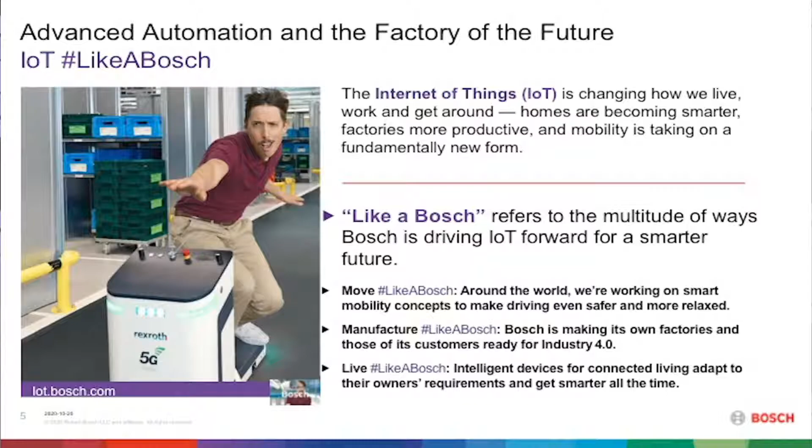Since we are not only producing solutions for third parties, but also provide solutions for ourselves, we launched a campaign worldwide, which is called Like a Bosch. So that addresses not only how we work and how we live in our houses, but also how smart mobility concepts could look like, or how the future of manufacturing could look like.

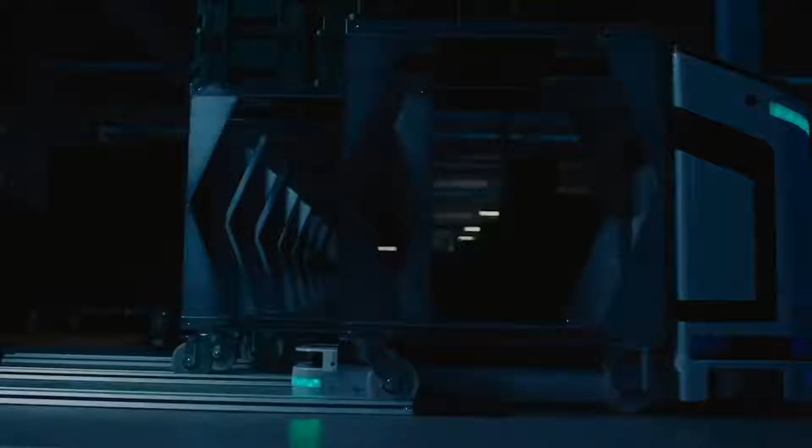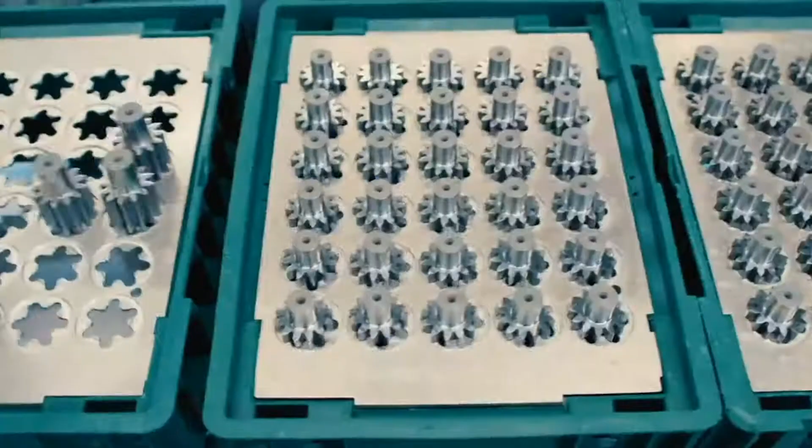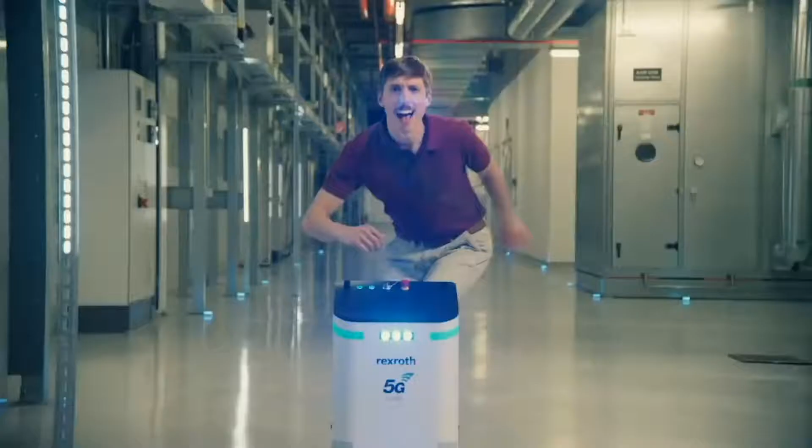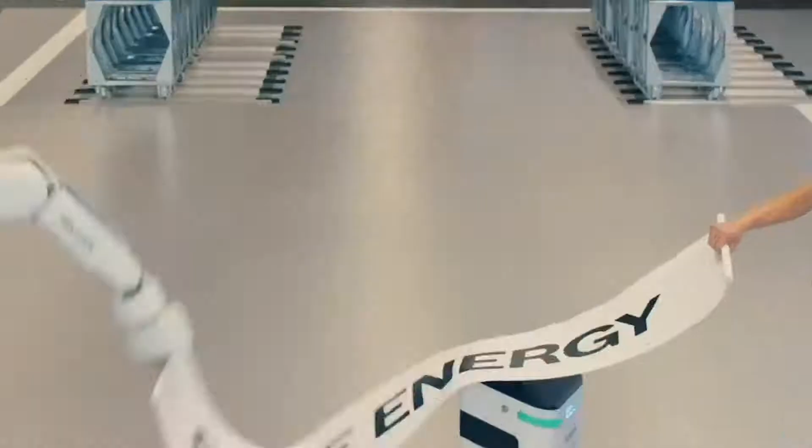Let's produce like a Bosch. Easy use, connect machines like a Bosch. Perfect team like a Bosch. Flexible line like a Bosch. Make it mine like a Bosch. No downtime like a Bosch. That's worth a rhyme. Did you say no downtime? That's not true, we have scheduled downtime. Like a boss. Control the tech like a Bosch. Phone check like a Bosch. Go 5G like a Bosch. IoT. So efficient, that's our mission. Never stressed, like a Bosch. AR test, like a Bosch. Data cloud, like a Bosch. Makes me proud. Together we save energy. Like a Bosch. IoT, IoT, IoT, IoT.

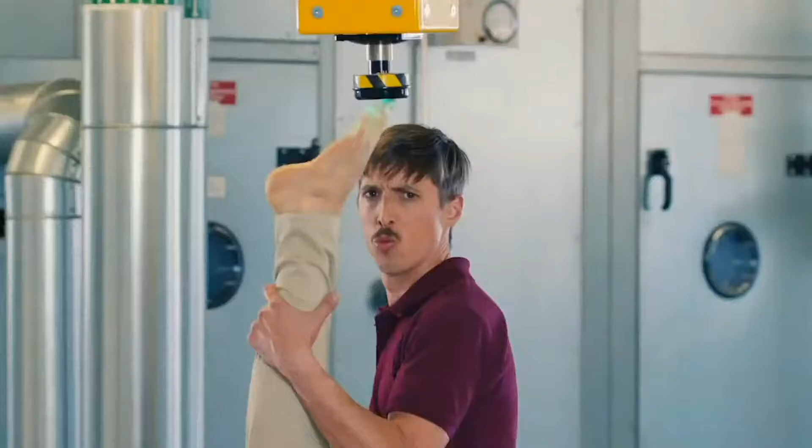Wow, there's a lot to do.

As I already explained, we are also developing solutions for advanced automation and the factory of the future. We started that journey many years ago, and we were testing a lot of those solutions in our plants. Obviously, this was a very technology-driven approach. We got the latest and greatest technology, thought about what we could do with it, and started implementing.

This worked out for a while, but then 3 years ago we did a reset. I'll explain how that worked in the next slide. We got carried away with the technology and forgot a little bit about our requirements and why we were doing certain AI solutions or certain Industry 4.0 solutions. So we made the decision to derive each and every project from our business requirements.

For instance, scrap rate, higher OEE, or certainly better quality. On the other hand, as I pointed out, we are a large plant, so we had a lot of experts scattered around, and nobody really worked together. So we formed a core team and networked our experts. In parallel, to a certain extent, the leadership was disconnected, so we formed a steering committee not only to involve the leadership, but also to educate them and make them responsible. Last but not least, we developed a strategy for ourselves, which we released 3 years ago.

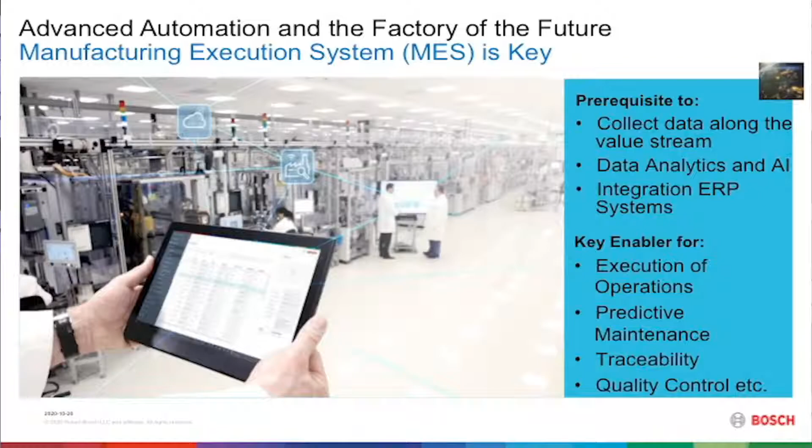Now let's look at some solutions we implemented. First of all, connectivity. The backbone for the connectivity is our manufacturing execution system. This is the key not only to collect our data, it's also the key to integrate our ERP system and run our data analytics and AI algorithms. It's the key enabler not only to execute our operations, but also for our predictive maintenance solutions, for traceability, for quality control, you name it. The next video shows you a little bit of an insight into what Nexceed can do for you.

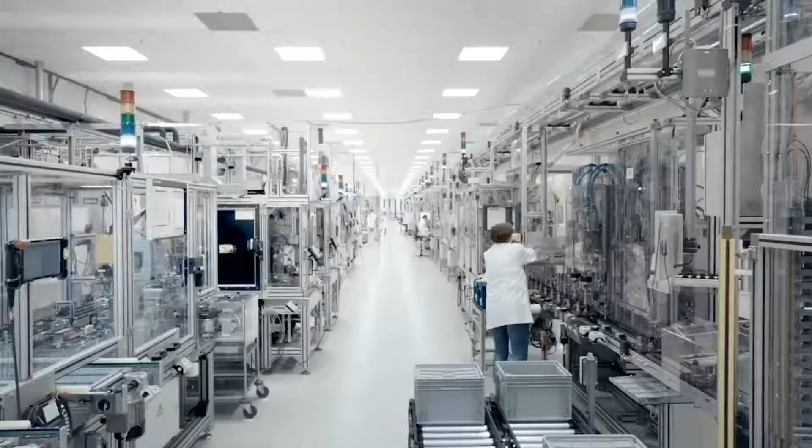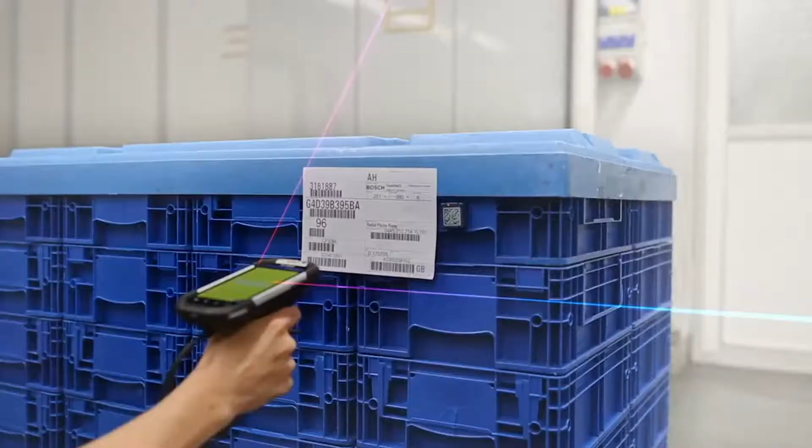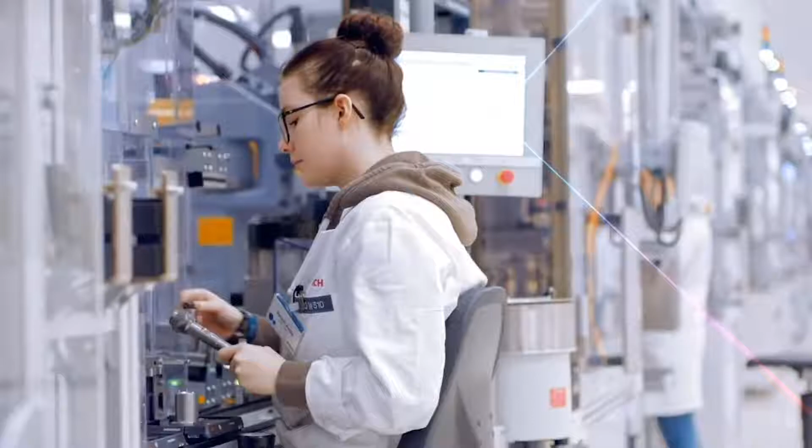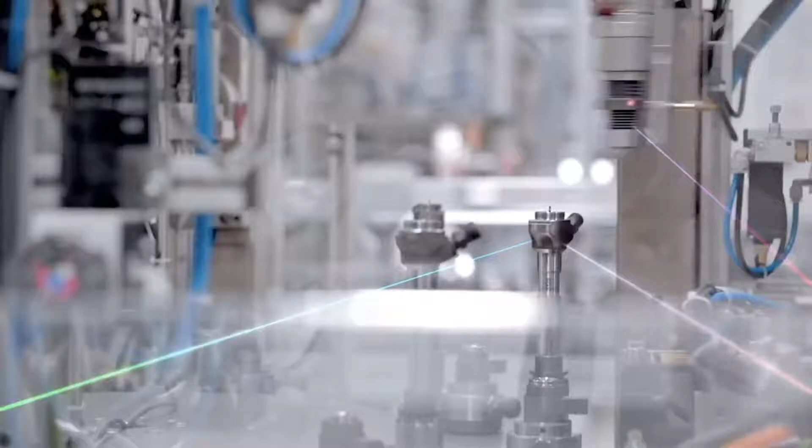Bosch Connected Industry, holistic Industry 4.0 solutions from a single source. Nexceed has one main goal: to support our customers in connecting their value stream. The Nexceed software solutions make sure that product, process, and logistics data of all machines and systems is used for continuous optimization, from procurement, through production, to the end customer. We can connect all Nexceed solutions, further Bosch solutions, and third-party applications. Nexceed makes it easy to get started with the connected factory. Bosch is both leading user and leading provider for Industry 4.0. In line with this strategy, we validate our Nexceed solutions internally before we offer them to our external customers, who profit from the experience of more than 270 Bosch plants all over the world. Nexceed, Industry 4.0 software from a single source. Bosch, invented for life.

Nowadays, we have done a completely digital shop floor management using Active Cockpit. Now there's no more manual effort for the generation of the required KPIs we need for our daily review of our value stream. We have real-time data straight out of SAP.

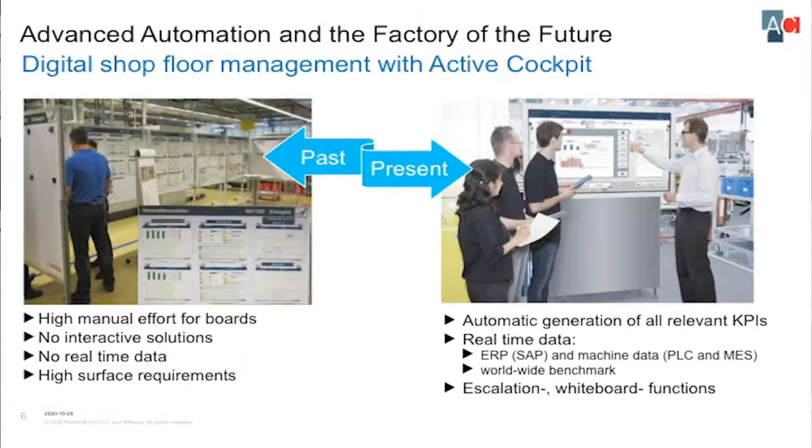Very important, since the products we produce here in Charleston we also produce in other parts of the world like India, China, Brazil, Germany, we can have a worldwide benchmark at our fingertips. So our engineers can see how they're doing, how their scrap rate is doing, how their OEE is doing every day in real time without any effort.

One of the next solutions we already worked on since 2017 was how can we start reducing the downtime of our robots? As we are a high-cost location, we have a fairly high level of automation. And out of our data, we found out that the robots contribute to quite a bit of the downtime, and therefore we lost a lot of OEE.

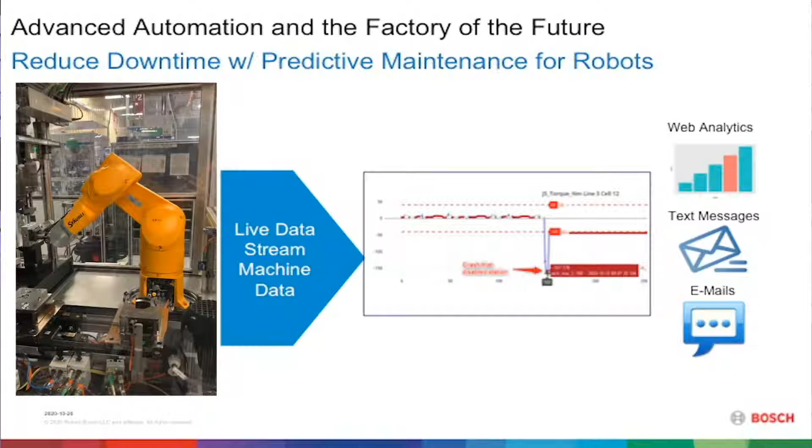That system is connected to our setup cell phones, but they also can use this as a web application, or it can receive an email.

Similar along the line is the connectivity of some older machinery we had in our plant, like for instance our washing machines and lasers. These are some integral operations in our plant. If we produce injectors, the thing needs to be clean, and we mainly use laser welding.

So what we did is we connected those older machinery with a tool called Device Bridge, and we are using, as mentioned already, Nexceed for the data collection. Then we stream the live data into our data lake, and we can use the Grafana tool in order to visualize any data we want.

So for instance, now we are able to monitor the temperature of the chilled water for our lasers. We can see how many batches are in our washing machines, and we can measure the concentration of the wash bath. So everything what the setup needs in order to improve its performance, we can visualize.

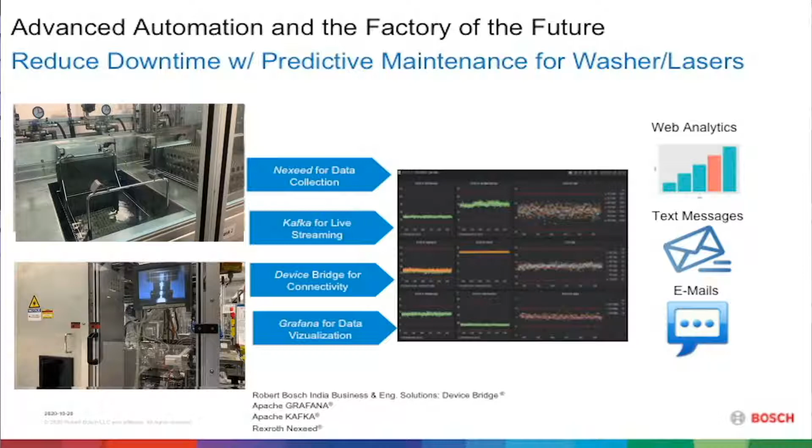Next, we talked about advanced logistics solutions. We started quite a few years ago and thought we need to automate our milk runs, and we started to implement those AGVs for our standard routines. We didn't start with something complicated, but with something easy. This pilot, which we're running now for more than a year, gives us the necessary confidence.

Then to move on to more complicated things like, for instance, dynamic routing our AGVs. With this, we would need our SAP connected directly to our MES and then to the system to run our AGVs. But that's the future for next year.

What we also are heavily involved in is our electronic Kanban system. So all our value streams are on a pull system. And in the past, it was rather difficult to implement a pull system, for instance, across a building, or it got even more complicated across the continent or across plants.

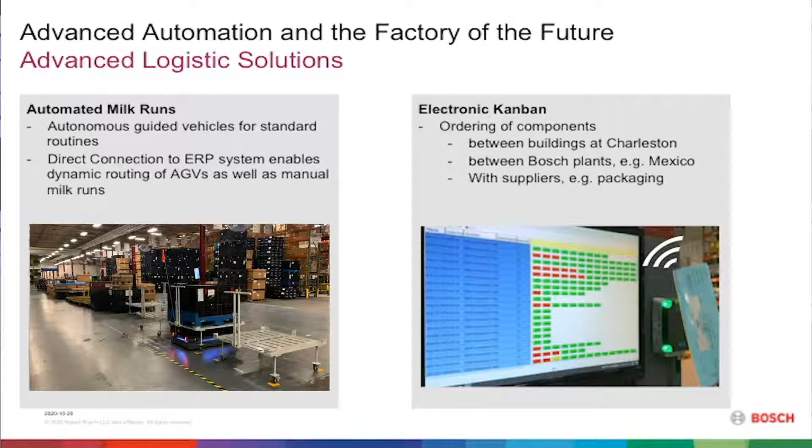So with this system, we are now able to order parts from our pre-production to our assembly lines from another building in our plant, but also from other plants. So we, for instance, order ECUs from our Mexico plant, or we order some packaging supplies from our supplier here around the corner.

Something which is, for us, a very ambitious process is to use AI-based solutions in order to improve our first pass yield in our test benches for our high-pressure pump. As you can imagine, a pump is quite expensive when you test it and you need to scrap it. And we thought, what can we do in order to significantly reduce the scrap rate? We found out we need to better understand what are the root causes or what are the parameters which influence the performance of such a pump.

And if you do this in a conventional way, you do this very analytically. With our AI-based solutions, we can quickly identify parameters which influence the performance of our pump.

And now we can, for specific types, adjust our machinery accordingly, and with this, significantly reduce our scrap rate.

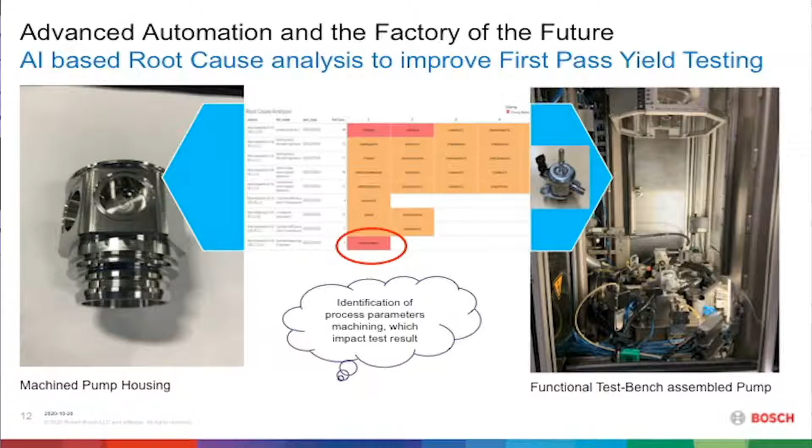Last but not least, I need to explain why we put so much emphasis on energy management and energy reduction. As you might have heard, Bosch was one of the first main suppliers in the automotive industry to go completely CO2 neutral already this year. So this puts a lot of emphasis in our plans for energy reduction measures.

The platform we use, we call it BEBS - the Bosch Energy and Building Solutions platform. We use this to continuously monitor our energy consumption in all the plants. This solution is implemented in all 270 Bosch plants.

We can, for instance, monitor the real-time air consumption, and then switch on or switch off our compressors accordingly, and that saved us last year almost 1,200 megawatt hours. Similar thing for our chilled water.

When you monitor constantly the temperature of your chilled water, you can accordingly adjust your chillers to accommodate the fluctuations in the need for chilled water.

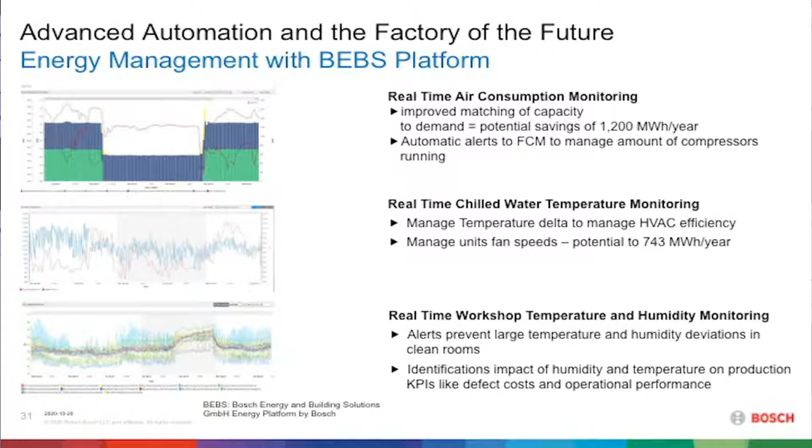A more ambitious task is that we monitor the ambient temperature and humidity, and also the influence on our production parameters. With this, we found out that for some areas in the plant, in our molding operations, the resin was too dry in certain extents in winter. By adjusting our humidity to the ambient humidity, we could accordingly improve our defect costs.

Coming to an end, as already mentioned, if you do Industry 4.0 solutions, it makes a lot of sense to derive it from the business strategy and from the business requirements. So you need a business case for each and every solution you put in.

Connectivity of machines as well as components is key. We made the decision to only use industry standards and not develop any of our own solutions, because the wheel is spinning so fast and there's so much on the horizon. We did not talk about the skill set and education, but technology is not our limiting factor at the moment - it's the skill sets of our associates.

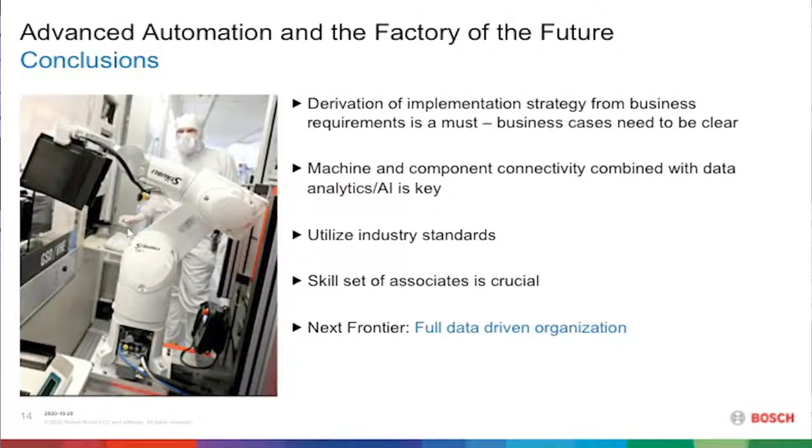Talking briefly about the next frontier, we will move into a topic we call the fully data-driven organization. We still kick off projects where we think it's going to be a problem, but we don't really know it. With a fully data-driven organization, we want to make all our decisions fully data-driven. Thank you for your attention.

Welcome back, everyone. That was Kai Woerner, Vice President, Technical Plant Manager at Robert Bosch. We appreciate you, Kai. I'm joined now by Richard Phillips, Director of Smart Manufacturing Solutions at Polytron. We'll be talking about smart manufacturing and best practices learned from multiple deployments.

Richard, welcome. Thank you, Rick. Glad to be here. I am glad you came. I believe you had to drive all the way here from Atlanta. I did, yeah. We're based out of Atlanta. I've been there for many, many years.

Let's talk about what you guys do, and then get into how you are helping manufacturers. You deliver automated factory solutions for manufacturers. You specialize in manufacturing, not only working in that industry, but specializing in it. Yeah, Polytron's been in business for 35 years. We work with mostly Fortune 500, but more recently small to medium manufacturers as well, which is something we're excited about. We've been delivering automation, process packaging, industrial network solutions, machine safety, and overall project management specifically for manufacturing.

So we just heard from Kai at Bosch. Now those guys are a little advanced, right? Absolutely, yeah. They're a fantastic company from the perspective that they're deploying a lot of these Industry 4.0 solutions and really showing the rest of the manufacturing industry how they get value out of these solutions.